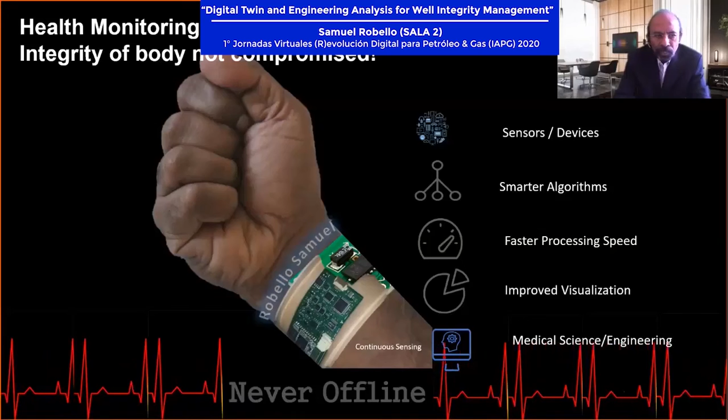If you take a lot of sensors and devices that are being used, the second one is smarter algorithms, artificial intelligence, data analytics, machine learning. All these things are infused in the health industry. Then faster processing speed—you can wrap it in your hand and monitor a lot of things. In addition, improved visualization on the go, anywhere, anytime—you can see what is happening in your body. The medical science and medical engineering are infusing into this space, studying biomechanics of the body. These are all the comprehensive advancements pushing the health industry.

With the same backdrop, can we do health monitoring of our well? How is the digital twin going to act so that we don't want the well integrity to be compromised at any time, whether during drilling, production, abandonment, or further? When you look at the landscape, a lot of technologies from horizontal industries are providing impetus—science and technology, the way in which we process is completely optimized and connected on the go, that we can leverage to find out the well integrity so that it is not compromised.

It is not just monitoring at the wrist—we can monitor on the palm of our hands what is happening. What is the well integrity? What is the asset integrity? What is the project integrity? That we can use it.

What is the same force driving it? Same thing—we now have a lot of advanced sensors, IoT devices, IIoT devices at the edge where we can monitor. We're getting hold of the neural network, smarter algorithms. In the morning we saw video analytics—how do we do that, how do we process it? We have faster processing speed and bandwidth that we can use not only to aggregate but to extract information at a much faster pace. Ultimately, we wanted to visualize—visualize on the go, anywhere, so that we are never disconnected from what is happening at the well.

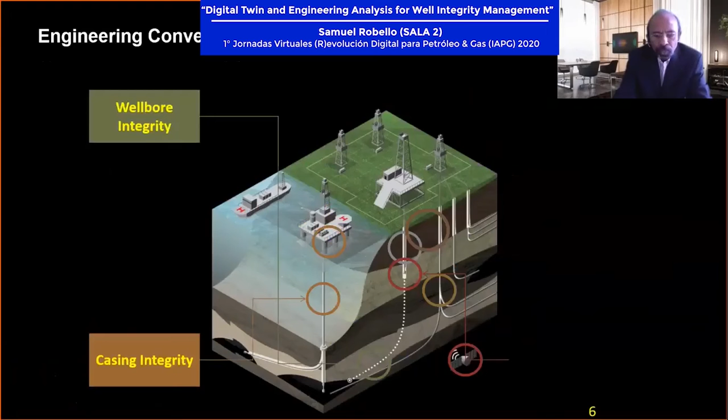You can see the wellbore integrity that we need to duplicate before drilling a well. Then casing integrity—if we go beyond the well, we have to see the casing integrity. Then we have to see beyond that what is happening in the annular space: what is the wellhead growth, annular fluid expansion, is it causing corrosion, or is it getting compromised by erosion, corrosion, wear—all these things.

Then the cement integrity - we look not only at the well, but beyond that. Then junction integrity, if we have multilateral wells with junctions, we need to maintain the junction integrity. Then top side, the structural integrity - this is very important.

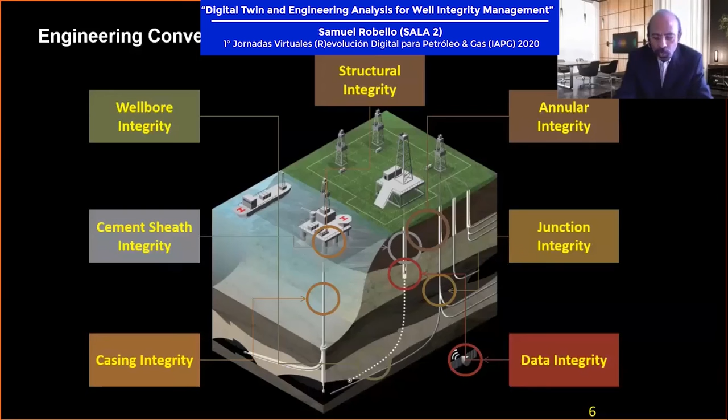Now top side, whether onshore or offshore, we need to take into account. Finally, the data integrity, which is very important as we go into the digital twin space. These are all coupled through three things: engineering, data science with AI, machine learning, deep learning, and uncertainty, because we deal with a lot of uncertainties.

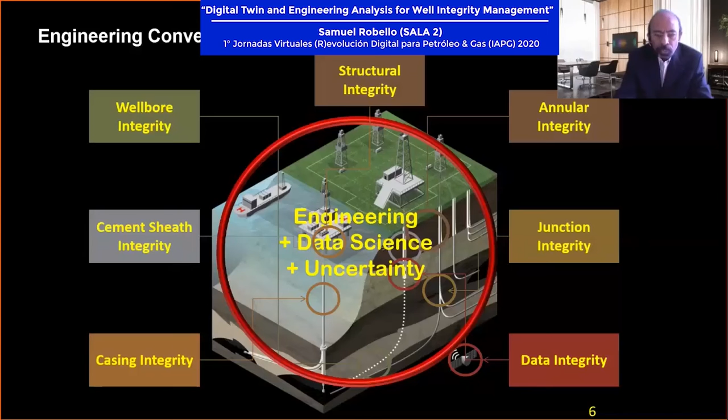We need an uncertainty-based approach to come up with a digital twin, providing comprehensive analysis of monitoring well health, like the medical industry does. We also need an open platform that can easily connect to different twins, whether on the drilling side, casing, cement, or production, so we can have a connected assets twin offering comprehensive value to the industry.

So you can see from starting bits, real-time data, production, transforming the data through IoT devices to the space where we want to visualize it. Embedded E&P data management is important. At the same time, we need a cloud native system so we can stream the data, analyze it, and visualize it. Then we should be able to predict ahead what is going to happen.

When is the workover going to happen? What is the health of my well? Not only that, but also the health of my whole asset. So smarter equipment, real-time connectivity, cloud integration, big data analytics - it's not just a PowerPoint. We have all these technologies, but we need an open platform where we can plug and play any digital twin.

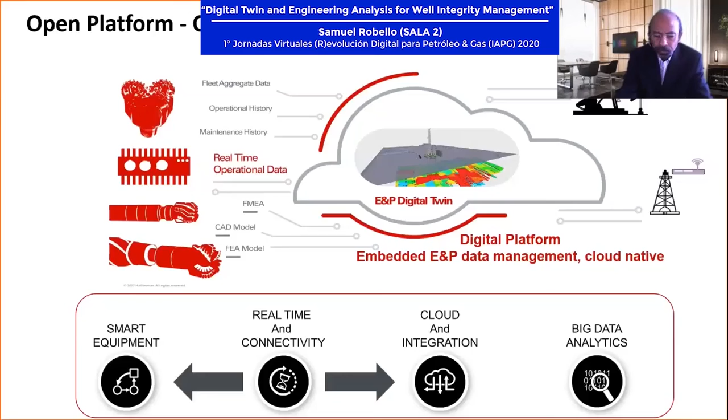For that, we need a comprehensive artificial engineering intelligence, AEI, mesh-driven well integrity management system - not just an ordinary dumbed-down system, but one with hyper-time compression, because we have a lot of data coming from different wells and assets, and we need extreme convergence, doing multiple engineering calculations at faster speed, which we now have the technology for.

We use artificial intelligence to mesh all things together for a comprehensive well integrity management system, virtually perfect but governed by physics and data - not just data, not just physics. It's a hybrid approach incorporating both. The data will handhold where physics falls short, or physics will handhold when the data is highly uncertain, creating a well-connected, well-integrity management system on the go.

So we need a single enterprise platform that is flexible and modular, able to provide options to select what you want rather than a rigid platform. Then open source standards where we can connect any open source connectivity or databases, not on a rigid scale. Total cost of ownership should be flexible and affordable.

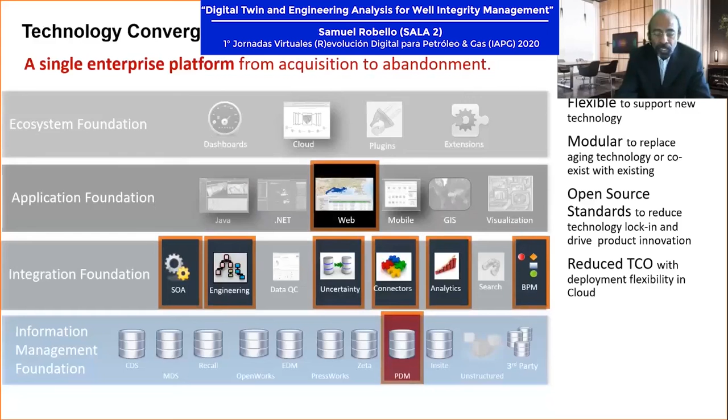Then finally, the ecosystem foundation, where all the things are connected through the cloud, the plugins, extensions, and the customizable dashboard. So it may look very comprehensive, but it should be modular, as I explained, so that you can connect whatever you need. That provides a solution that is not very rigid but more modular, so I can connect any engineering module that is needed, and also make it more artificially intelligent, as I presented earlier.

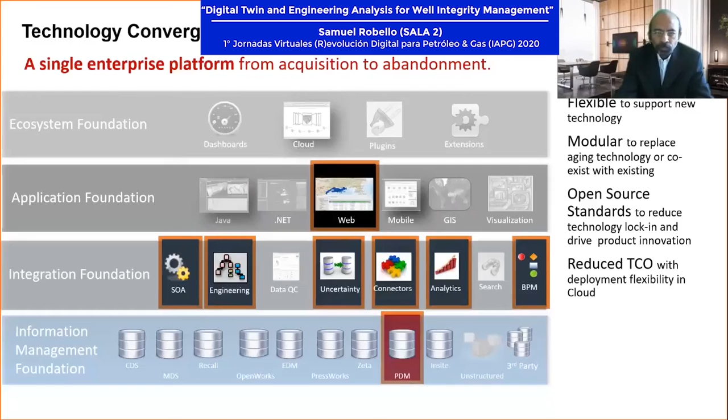So automatically it runs through the calculations to come up with the solutions that are needed. Then it should be holistic. It should be lifecycle management, not just for a well, but end-to-end for a particular well, wellbore, or asset. You should have the basis of design, construction, operational intervention, and abandonment. Then you should relearn, sometimes unlearn what you have studied, but take it beyond that, which provides the reinforcement to the learning system.

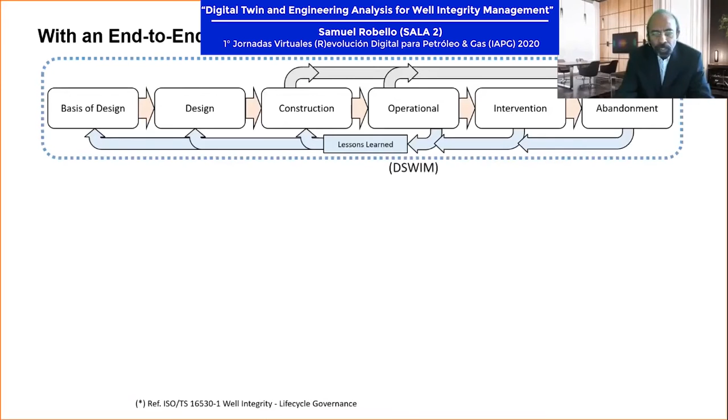That provides the digital space for well integrity management, which is modular, affordable, and easily deployable. Then you have integrity visualization and the assessment tools, because we need to assess what risk we are taking, and have an estimate of what we need to do in the coming months. How many wells are going to be shut down? How many wells are going to be put on workover operations?

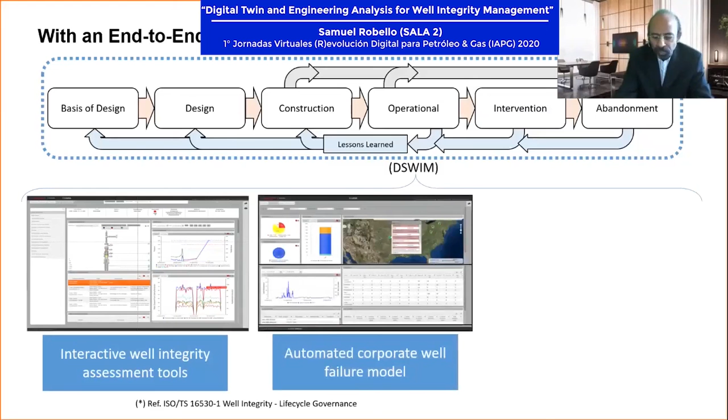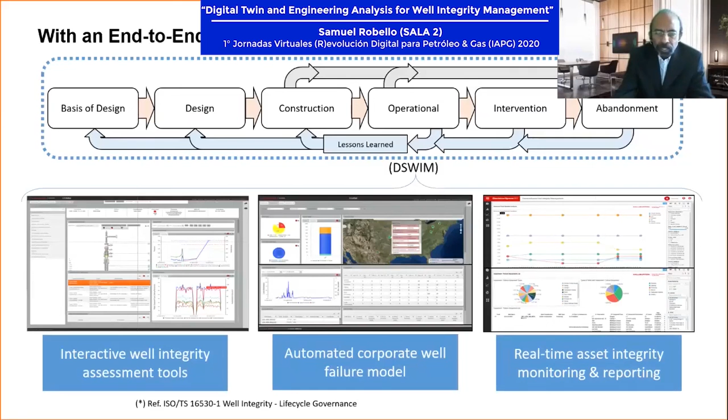These are all important. Now we have a lot of edge devices that we can put on the wellhead, IoT devices where we can stream data and do stream data analytics. That will also incorporate some failure models on an asset basis. Then, as I said, we have to move and view what is happening on the go, real time, never offline, connected, and see what is happening. I want to see it on the palm of my hands through some of the devices.

And eventually we have to report. Emerging well integrity opportunities, you see a lot of things are changing tremendously. The horizontal industry is providing exponential technologies that are growing very fast.

You can connect third-party monitoring devices or automations that can be connected to the cloud, and eventually you can easily duplicate what we want. So, as I said, not only the IoT devices, but also IIoT and edge computing and edge devices are helpful in this space.

Then the important one is the engineering coupled well integrity. Otherwise, it will become just a dashboard processing data, slicing and dicing the data, but it doesn't provide what is happening, what is the physics behind it, the justification of the failure of the well, and also the predictability of the well using the model.

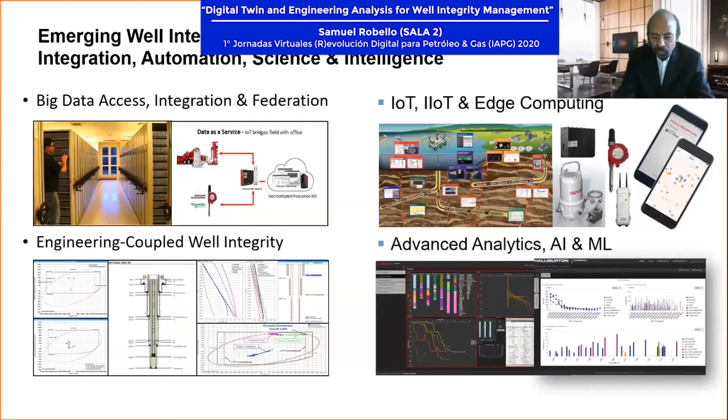Then, as I said, it is a hybrid approach of physics plus data. Then we use data analytics, artificial intelligence, and machine learning so that we can learn, relearn, and reinforce on the data, which provides more comprehensive analysis. So that makes it very evergreen. The digital twin and the well integrity management are always evergreen, always updating because of the real-time data that is coming in.

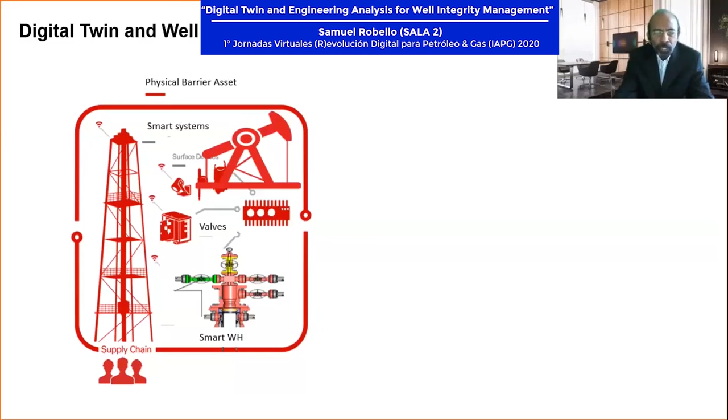So we have smart systems, a lot of valves, smart wellheads, making it a more digitally twinned wellhead, and also the supply chain, how much we need to replace, what parts are needed so that they never go offline. That is the physical barrier asset. Then we make the well integrity digital twin. Most of the time we make the digital twin and compare it with a physical barrier asset, but here we have a lot of wells that we can use as a baseline, then digitally twin. Then you can also connect it back to the physical barrier.

So we have other devices, AR, VR, IoT devices, interactive devices. We have seen visual analytics, all these things. We can combine it with well engineering, which will provide the well integrity management. That is the space for engineering and science. So you can clearly see the demarcation between engineering and science. Engineering is what we have done and what is going to happen - I will give an example - and the science is data science, machine learning, artificial intelligence in that space.

Then the technology, cloud, big data, providing stream analytics, processing of all the data, quality control. That eventually is a combination of this digital well integrity management system. It is not just a well integrity management system.

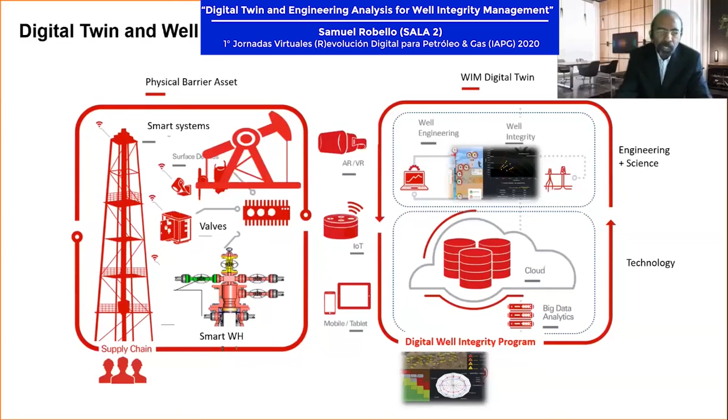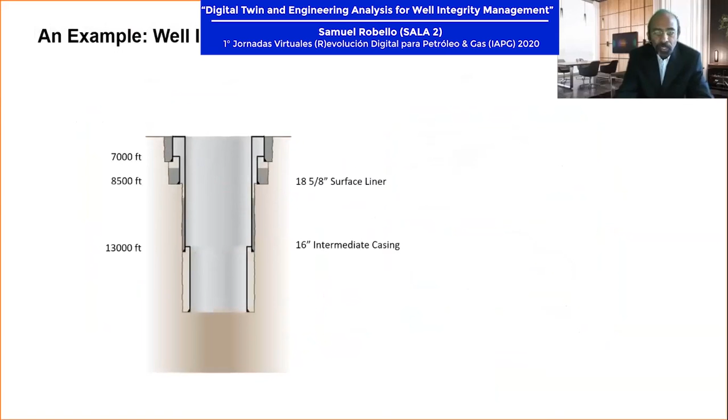I'll take you through a simple example for this engineering coupled well integrity management system. This is an offshore well. You see a surface liner, then an intermediate casing that is 16 inch, and 7-inch production crossover, then a 5.5-inch production tubing.

So now it's a complex casing design which has not cemented all the way, and it has a lot of issues that may come up, right? Wellhead growth, annular expansion, and uncemented portion corrosion.

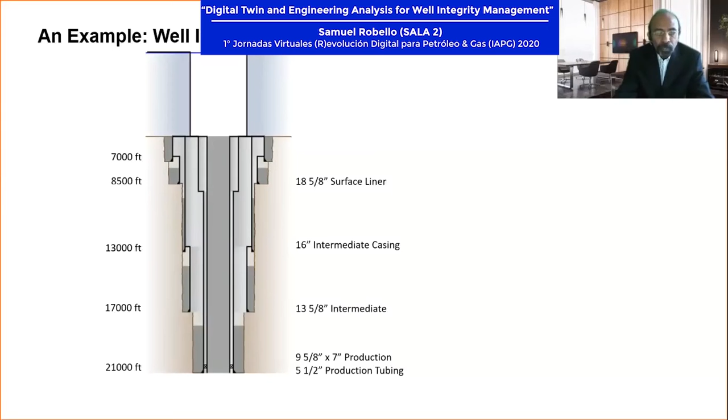How do we justify and calculate the well integrity management? So we need to have essentially, if you think of the production, 1 year, 1 day, 1 month, 1 year, you can see clearly how it changes. The temperature profile is different now. We see annular A, B, C, and it may be prone to leakage in the coming days.

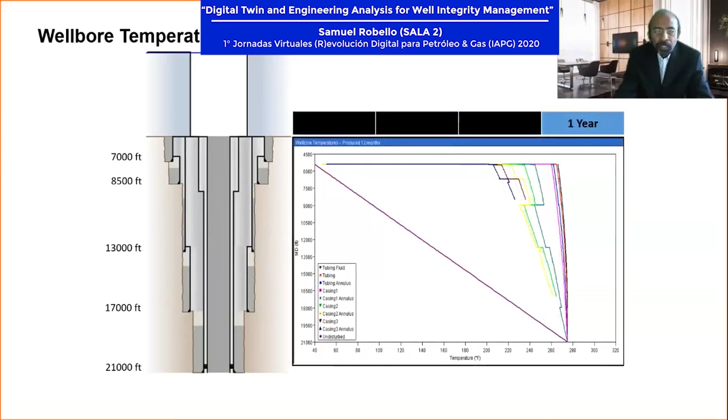Maybe it is good, as we have seen the health of a body, then it slowly gets degraded. So if you think of not only the well side, the top side is also important. The seals that are sealing at the top on the wellhead, it's a subsea well.

Now, the temperature, the change in the properties of the mud behind the casing, how it is going to get affected. Not only just looking at the movement of the casing, but also we have to see how the whole composite system is getting affected.

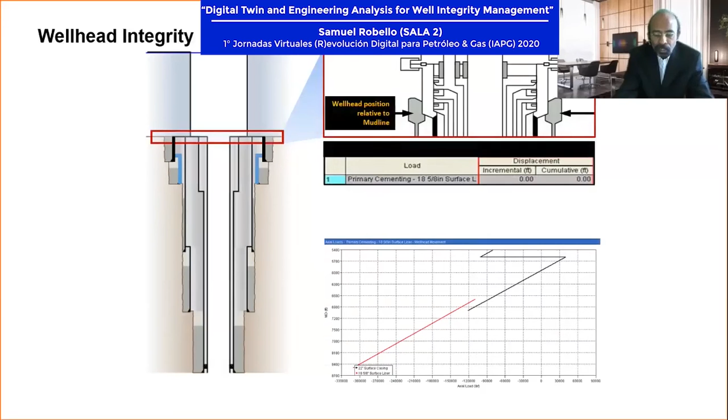You can see here as it is producing 1 day, 1 month, 1 year, and several years, it completely changes. And the displacement is appreciable. That we cannot neglect it.

Just getting the data, putting IoT devices on the surface, measuring all these things, that's not going to help, because we need to understand the physics that is going behind this comprehensive well design. Because the data doesn't know the physics.

But we have a lot of assumptions when we calculate the temperature profiles and the wellhead growth, annular fluid expansion. But the data will always handhold and suppress some of the uncertainties, and it neutralizes some of the paradoxes which we see in the day-to-day life.

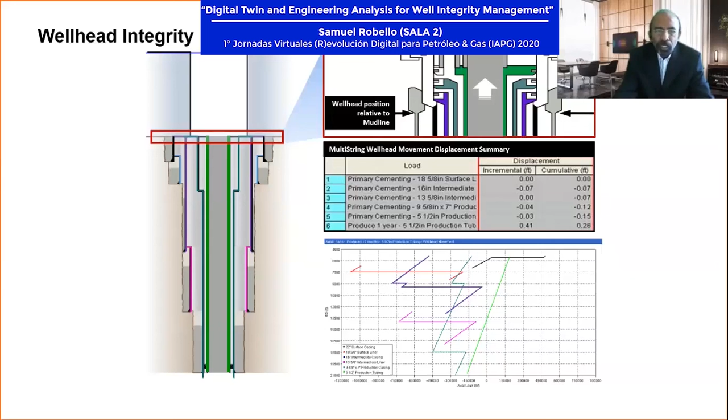So this comprehensive analysis provides a more in-depth analysis of well integrity management, not just a business practice, but it infuses the underpinning of engineering calculations. With that, I would like to summarize.

Right now, with all these calculations, we have to have a summary report. What is going to happen? I do all these calculations, but I want to visualize what is happening in a particular well. Is it giving a signal that it is going to be under workover operation for 2-3 months? Or should I take remedial action so that I can mitigate the downtime?

So it adds value, some of the invisible lost value we can recover. And also, I need to see the risk. Can I take the risk of producing the well for another month, but still reduce this problem? We can avoid it. So that will give, at the bottom, the risk graph and the risk index.

And also I can see how the asset is performing. One well, probably I can take the risk, but I should not take the risk of 50% well shutdown. So it gives a comprehensive analysis, which we can do using the digital twin.

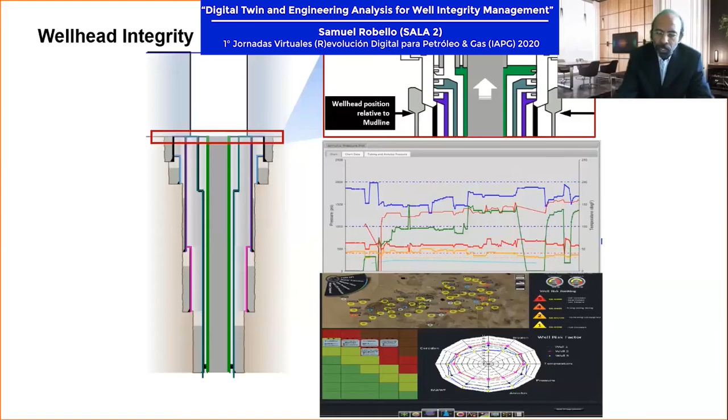Finally, in summary, a few concluding thoughts. Before parting, I wanted to emphasize we have to go beyond presenting just a business practice, but we need to have a comprehensive analysis that will be more intelligent. Artificial engineering intelligence, that is...

Hyper compression of data so that we can analyze and derive value out of it. And also end-to-end life cycle integrity. Now we can digitally twin each component, and also we can have a comprehensive digital twin.

That will be possible by leveraging the engineering science of what is happening, having the physics embedded into the system. Then definitely we have to learn and adjust. The digital twin is evergreen, so it can update as we get more data, and then it helps.

It helps not only monitor the old wells, but also new wells in real time. Old wells, probably we may not have monitored properly, but still I think we can mitigate as the well ages. As the well ages, definitely we have to have a different approach as opposed to the new wells, where we have digitally connected, so we can monitor in a better way compared to the old wells.